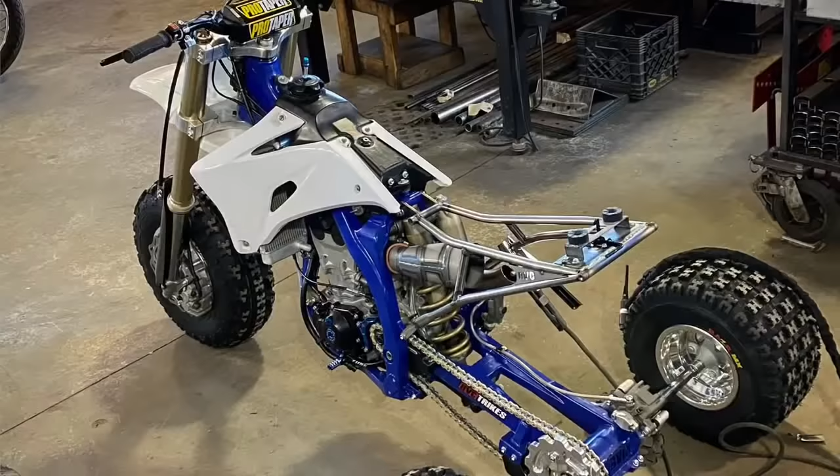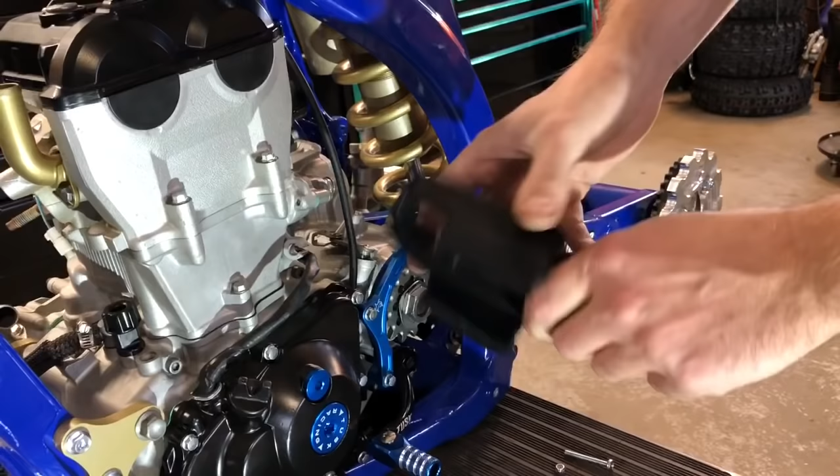Guys, so now we're going to install our chain guide. We use TM Designworks, but we actually modify them. We clearance this out to fit our swing arms. So first thing you're going to do is take your sprocket off.

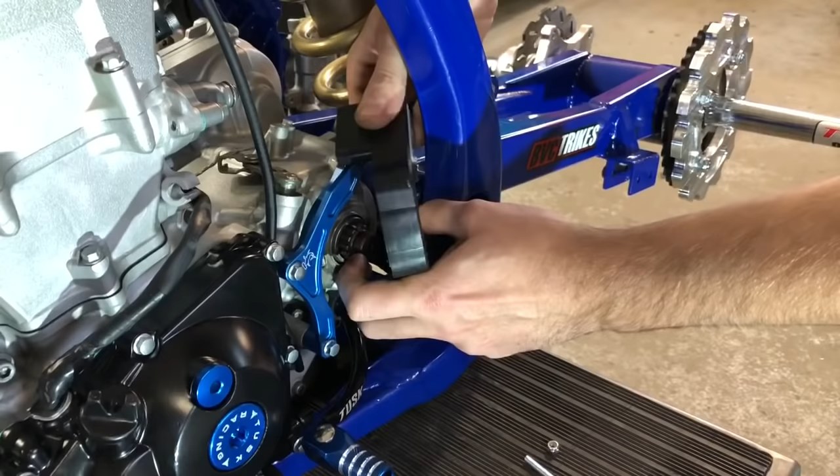You're going to take this, it's going to come with a bolt in it. You're just going to take that out, stretch it a little bit. Just work it around your swing arm, around your motor. It's a little tight, but it does go right on, just like that.

And now you're just going to go back on over here. Slide your bolt through with your washer and your nut. And when you snug that down, it'll be right on the swing arm.

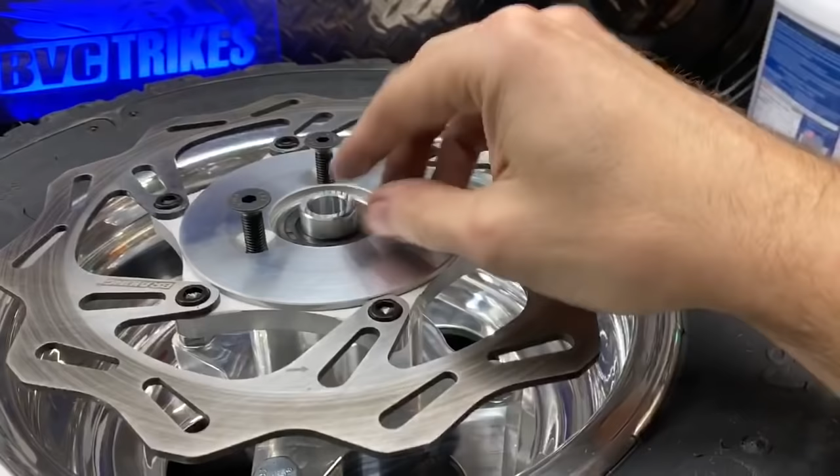Now guys, it's very important when you install your rotor adapter bolts, use some red Loctite on these. Same thing with all of your rotor bolts themselves, definitely throw some Loctite on there.

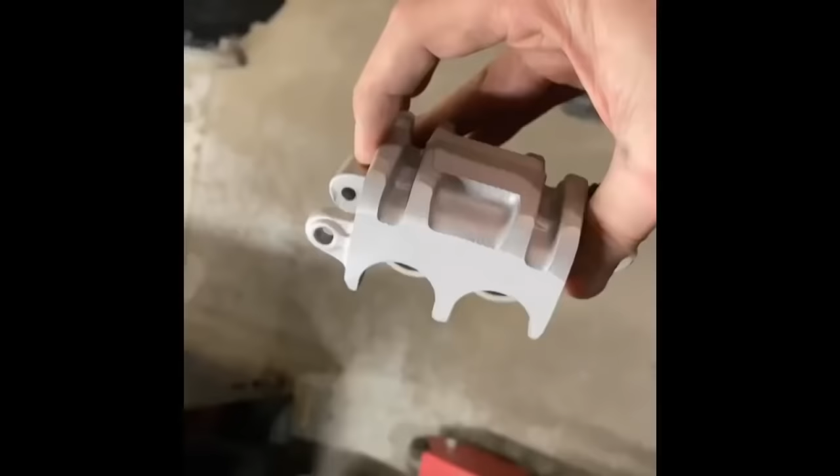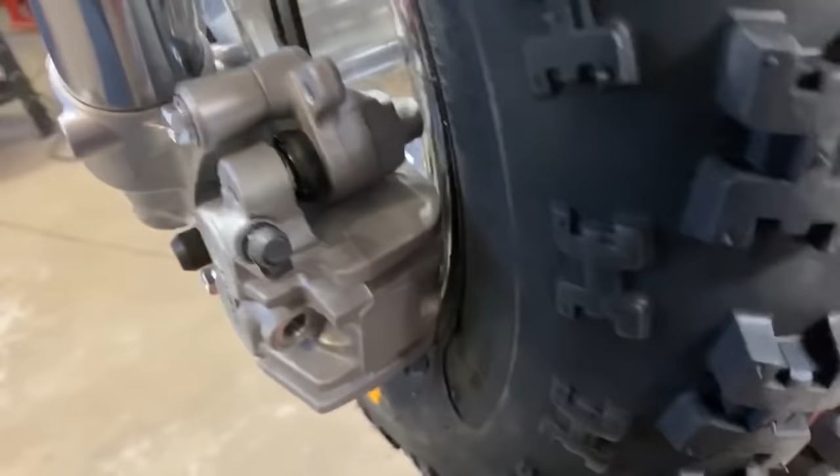Here's another shot of the front caliper clearance. You can see why we actually shave part of the caliper on some models. Not all of them require this, but on the Yamahas, they just have a very large caliper. So we always check fitment, make sure you got clearance there. Let's see if I can zoom in here.

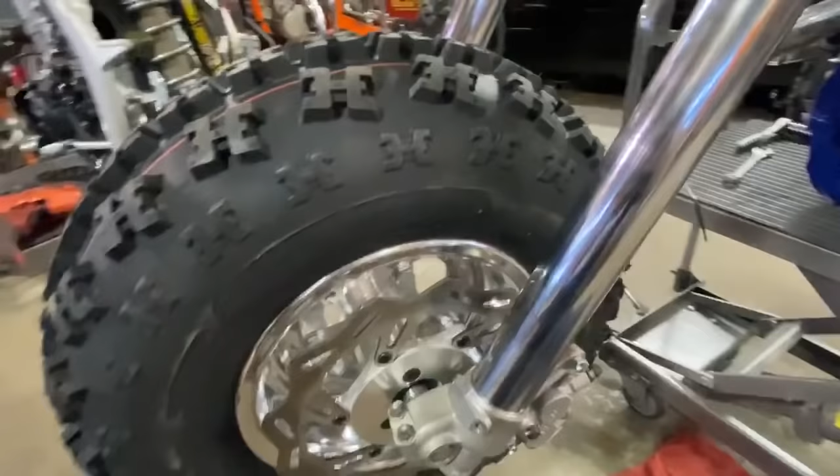Very tight fit, but we're running modern larger dirt bike brakes on these. So sometimes you gotta do some shaving and some fitment.

You can see our front hub with the 10-inch wheel, rotor adapter. You're mounting your original dirt bike disc on this rotor adapter. We put the axle flush on this model. Got our spacers on each side.

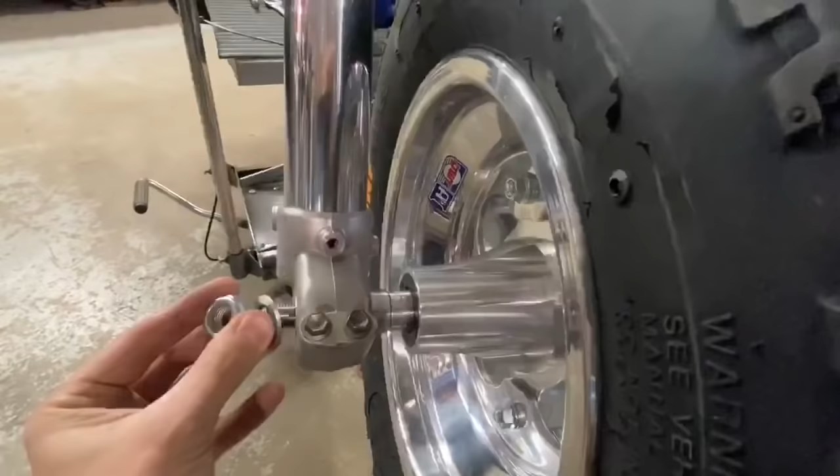Always make sure you have enough stick out over here so you can get your washer and your nut all the way on. You don't want this thing hanging off, so always check fitment, make sure everything looks right. Very important. That's pretty much it, guys.

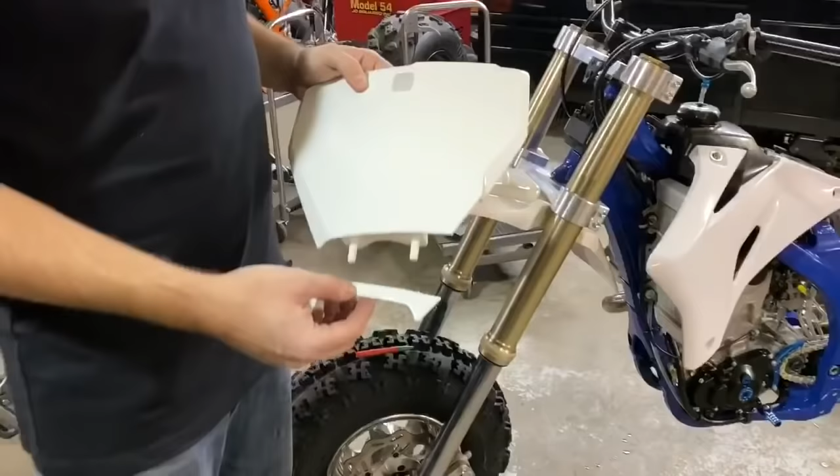Okay guys, so everyone asks me what number plates we run with our triple clamps. If we're not running a headlight, we actually like to use the Husqvarna dirt bike number plate. We simply trim the bottom of the plate off like this with a pair of tin snips, and then clean your edge up with a razor blade. It leaves these two little pieces sticking down.

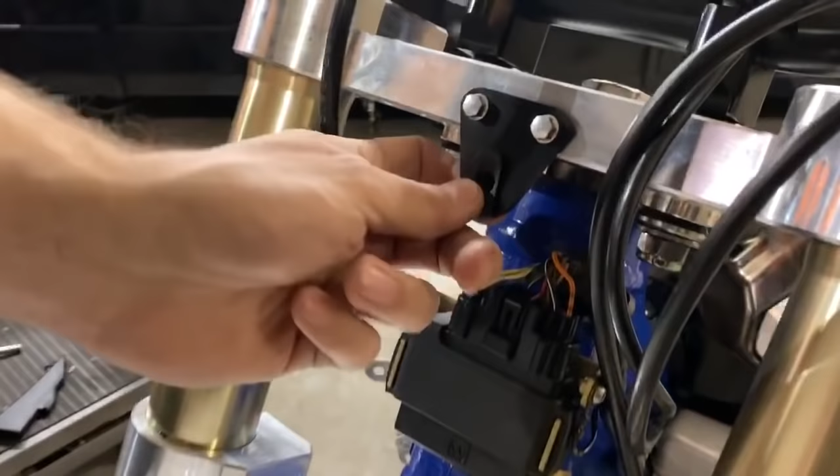So now I come over here and I have a bracket that we include with our triple clamps, and we have a threaded insert right here. So all we do is we line this up, and I quite simply just drill 2 holes in this 200X fender. This will slip down into the fender and then bolt right here. Super clean setup. It clears all the cables. It actually acts as a cable guide when it's mounted right here.

Keeps your cables where they should be. Keeps everything super clean. You don't have any annoying tabs up here. So we try to keep everything as clean as possible. It is a little bit extra. You do have to buy a number plate if you want to run one like this, or you can make your own mounts for your plate, but this is what we recommend for the $15 that they are.

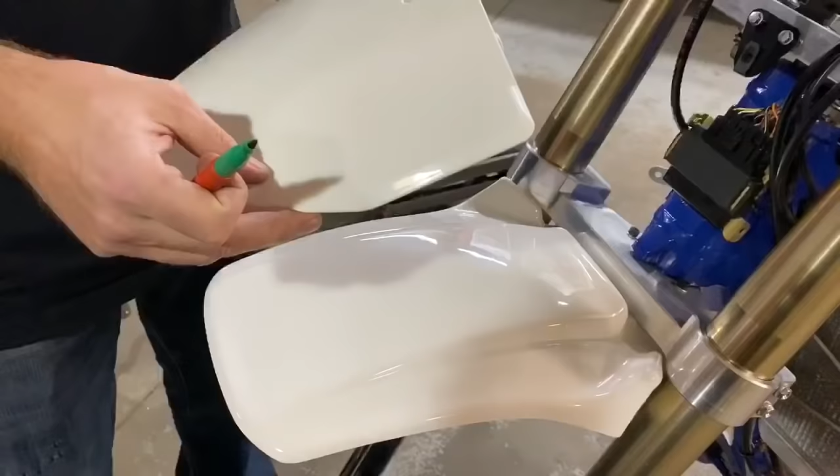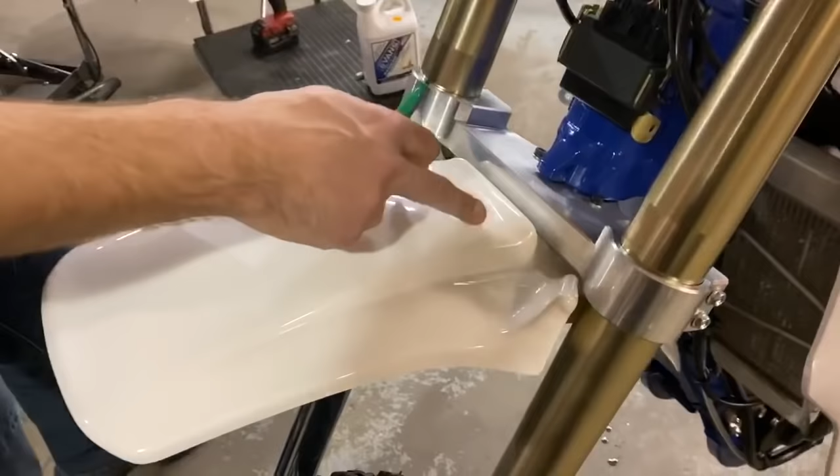So all you do is you hold this up right here, line up your bolt hole, and try to set your angle of your number plate so it's not too far back. You don't want that pushed in look, so I try to set it just about right there. And then go back a little bit and just mark with a marker directly in front of those little pins. And now you're gonna drill 2 holes here that I would say is slightly smaller than the tip of this. Just, you want this to kind of press into it, and it will expand out when you press it down, and it'll hold it nice and tight.

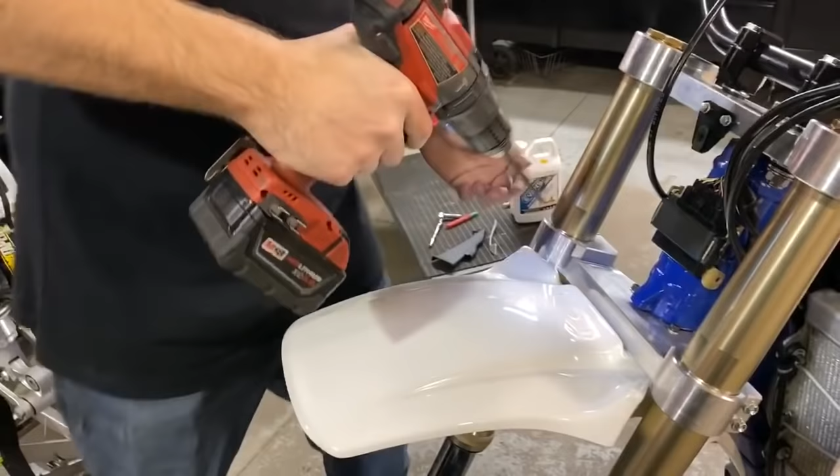So this is a 5/16 drill bit. I'm gonna start there and see how it fits. Just gonna very carefully drill these holes. Grab the air gun.

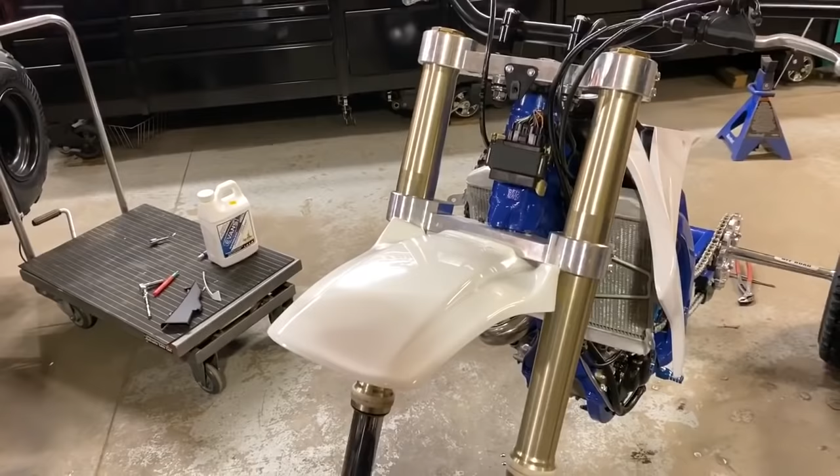Now, take the number plate, stick it down into the holes. See, that slides right down. I'm actually going to open that hole up slightly so that this goes a little bit farther down. That's pretty much it.

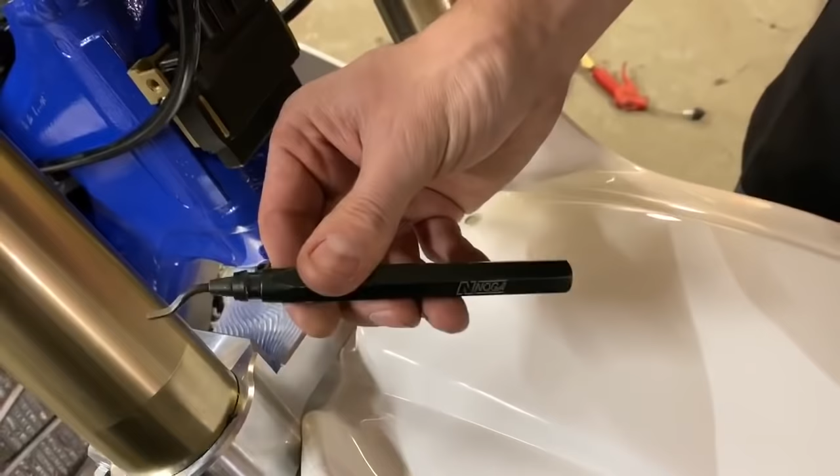So, if you guys don't know what this is, a deburring tool. Just take it and clean up your holes. Gives a nice finish when you can get all the pieces out. Just like that.

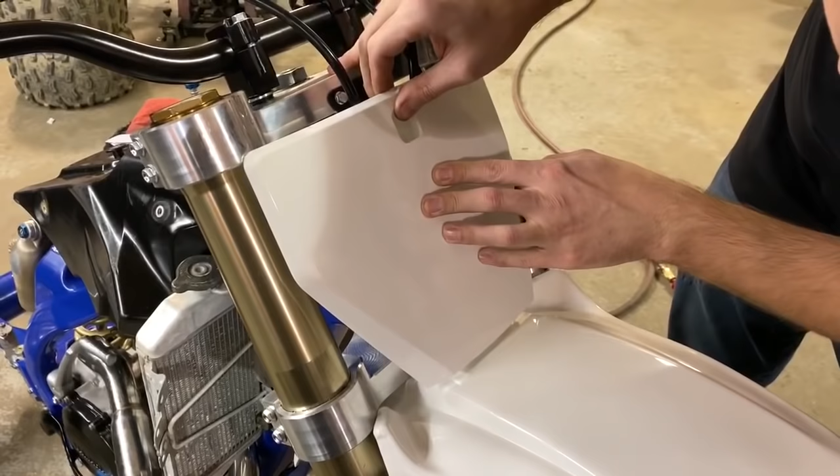Alright, so now, slide this on. Try it again. So now that goes all the way down. Now we're going to bolt it onto our bracket. Simple as that.

Well guys, she's coming together pretty good. Got the subframe all mocked up. We actually decided to go with a Honda seat and plastic on this build. It's honestly what we keep in stock for most of our builds, so it kind of made sense for us. And on top of that, we like the way it fits, and we like the seat height that it provides.

Kind of see what we've been working at here. It's a bit of a process creating a subframe from scratch when you haven't done it before. Definitely takes some time, but if you take your time and make sure everything's perfect, it's amazing how it turns out.

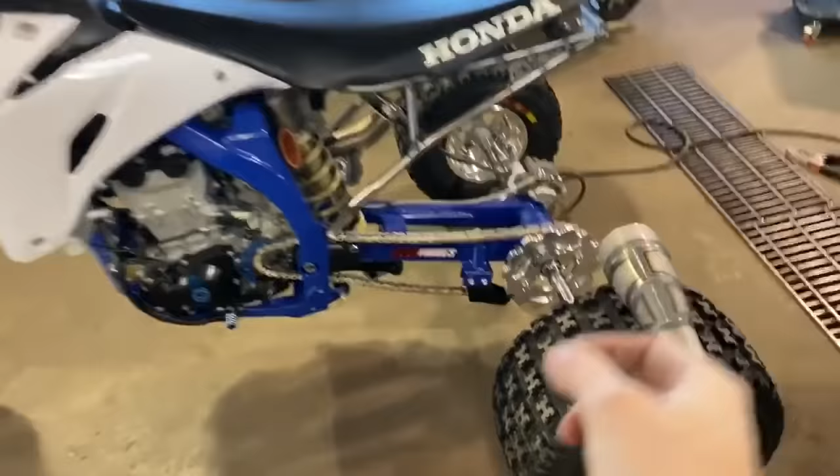Yeah, this build's gonna sit nice. It's our intake tube. It's gonna go into the intake there.

Another project that was shipped to us today. Another CRF 450R. He actually crated it up himself, took the bike apart, so that was pretty cool. Looks like he did a nice job. I'm gonna open it up actually in a bit here. A little bit of a drive.

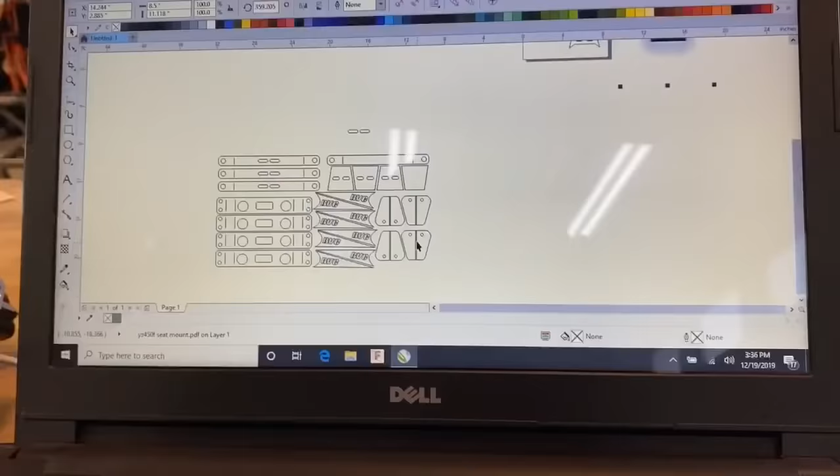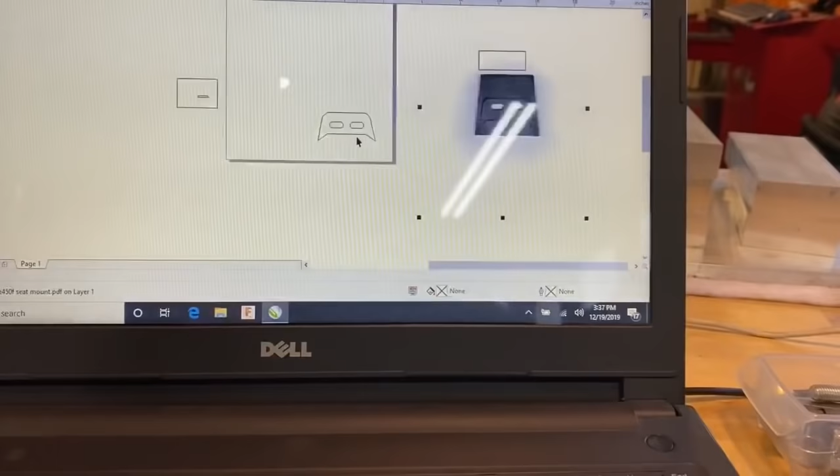Just want to show you guys a quick process of how we actually draw parts for our plasma cutter. I apologize if the video is a little bit funny looking, it just does that when you're videoing the screen. But as you can see here, I needed to make a front seat post mount, so I quickly sketched it out. We actually scanned that in, brought it in as a PDF, and this is now our tracing of that. There's many tools in Corel Draw that you can use.

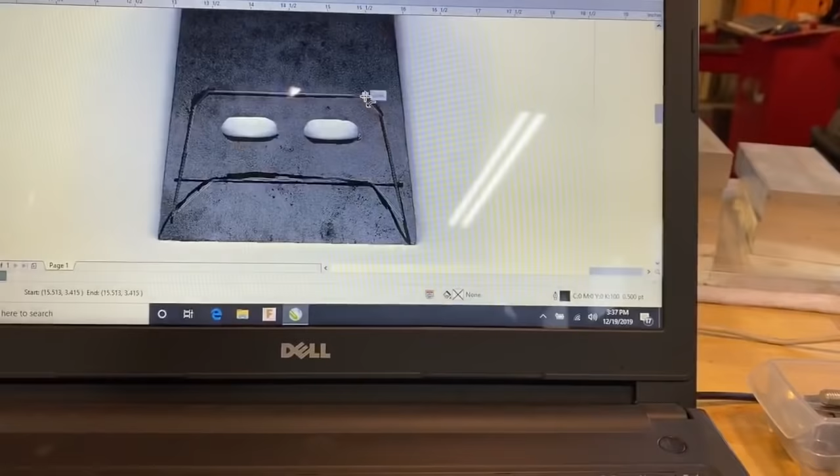For example, when you're drawing it, you can go right here. You get the idea. Obviously we would clean this up, but everything starts out as a 2D image for plasma cutting. So there's our finished drawing, it's already grouped together.

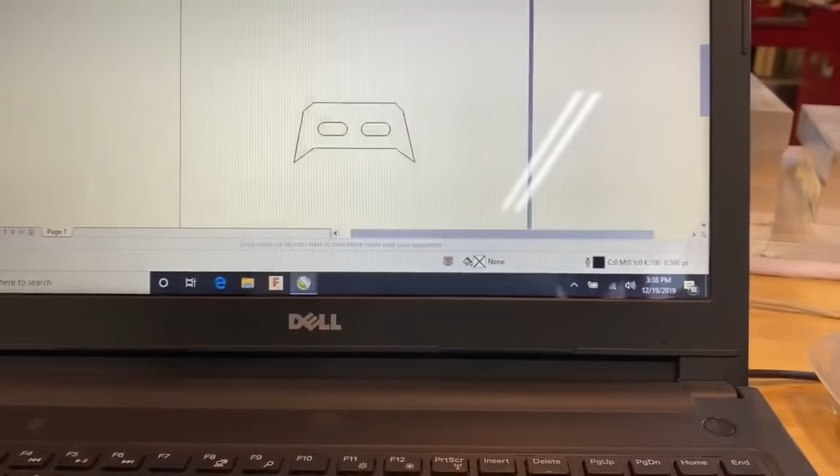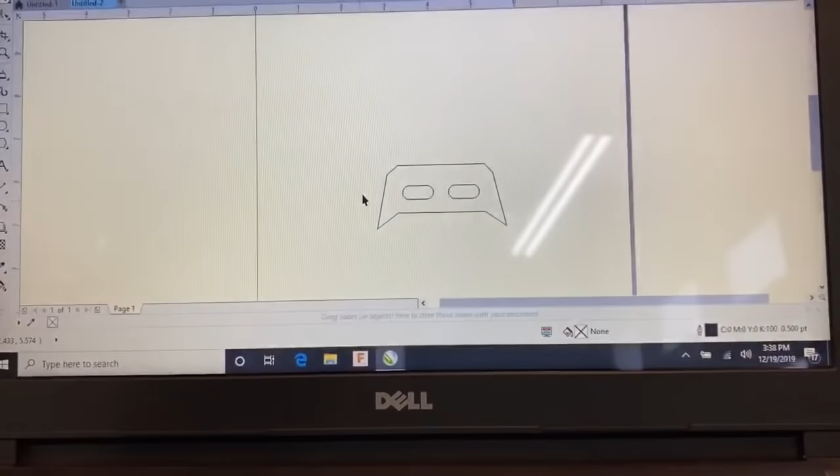So now I'm going to put that into a new window, center it, and export this to the drive. I like to label all my folders. Seat mount front, replace it, hit export. I actually made an adjustment to it. I already built one on the bike, but I wanted to move the holes back a little bit just to tighten up the gap on the seat post. So just like that, it's on the drive.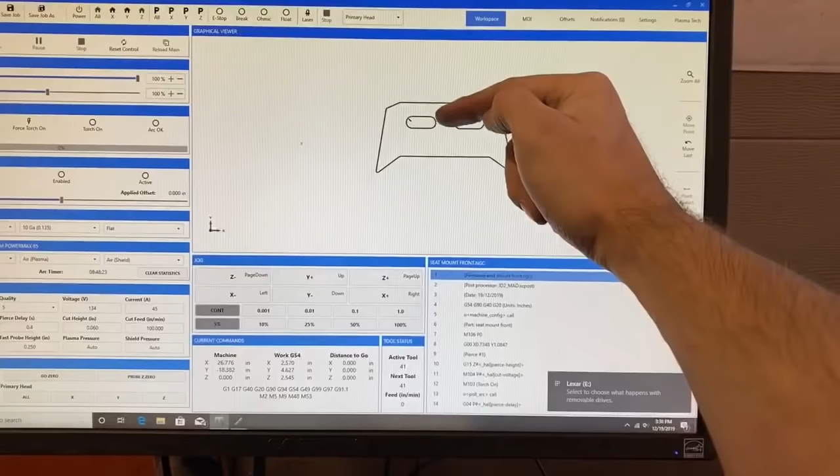Bring that over to the plasma cutter. That's the old file, I actually moved the holes back a little bit, and select the same name. You see here the holes are actually back the way I wanted them. Always double check that.

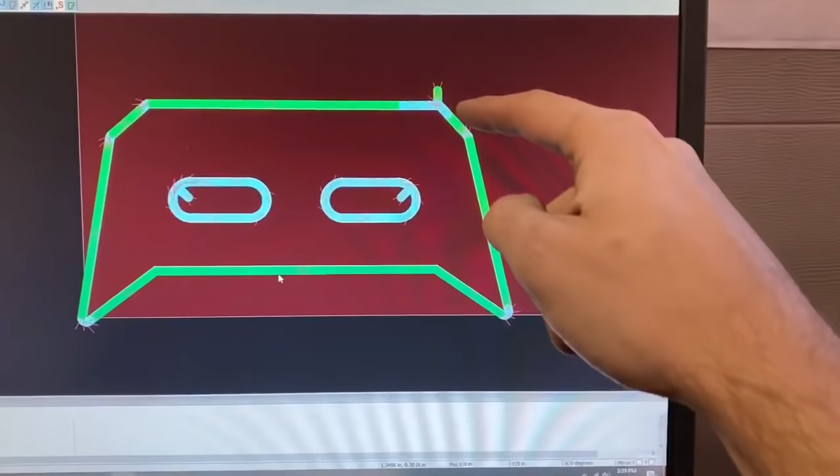Alrighty, so all we're doing is telling the program where the cut's actually going to be. We have a lead in and then the actual cut, and it does know to have the offset, so when it does cut your hole it comes out to spec.

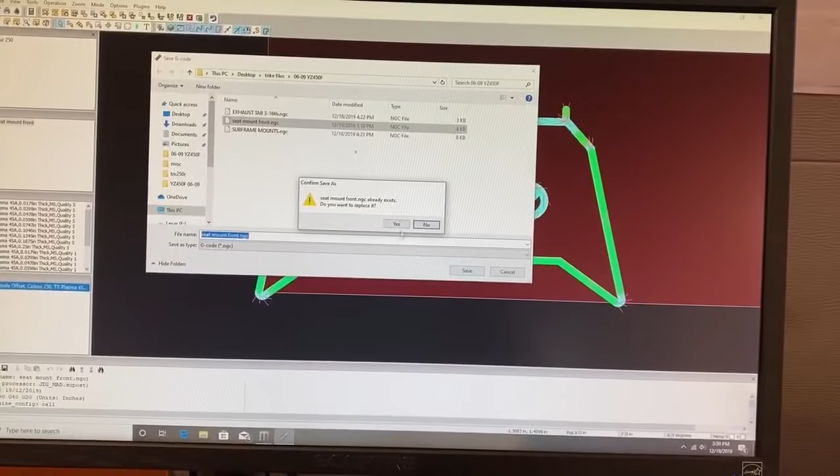So now we're going to post process that. We have an additional file that's actually named the same with a different file format. We go back to our actual software here and re-import the one that's updated. See how the holes move down right here again. Make sure that's correct, all the materials look correct.

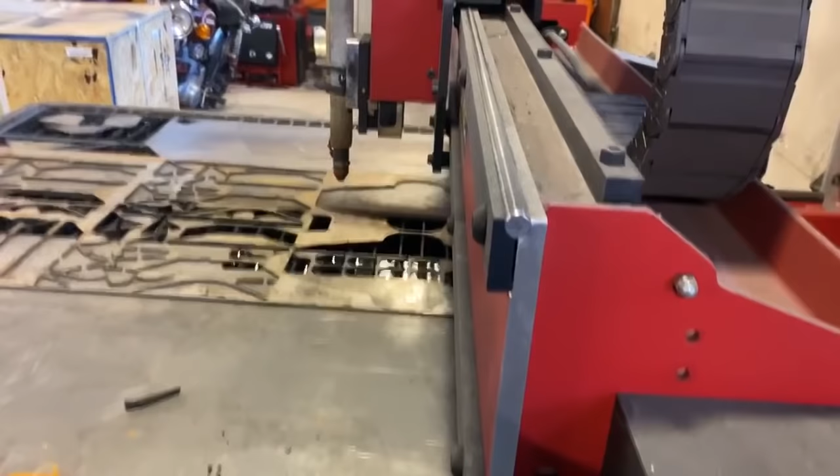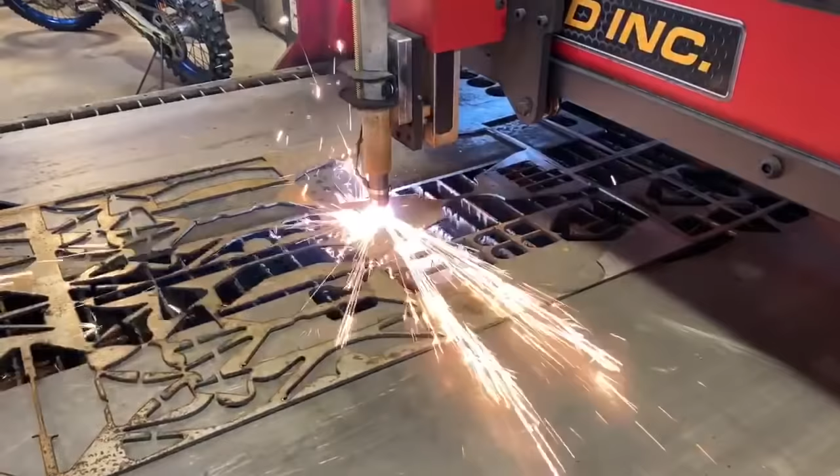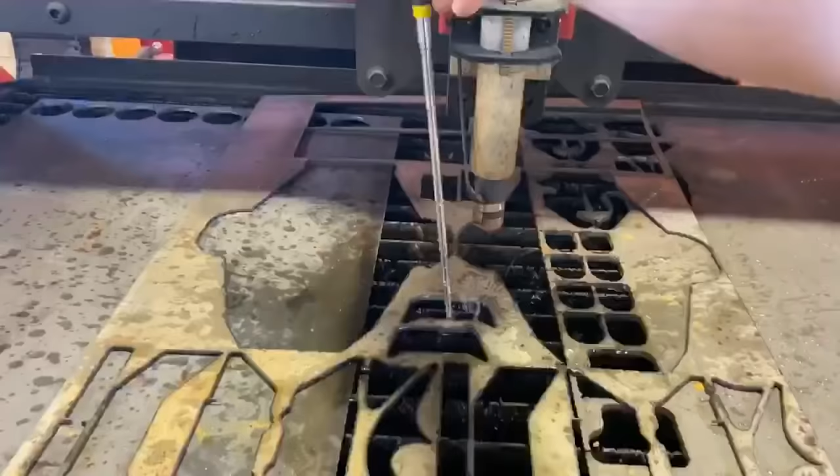So I'm gonna jog the torch. We're gonna zero all, so now our torch is zeroed for that location on the metal, and we're just gonna hit run. There it is, guys.

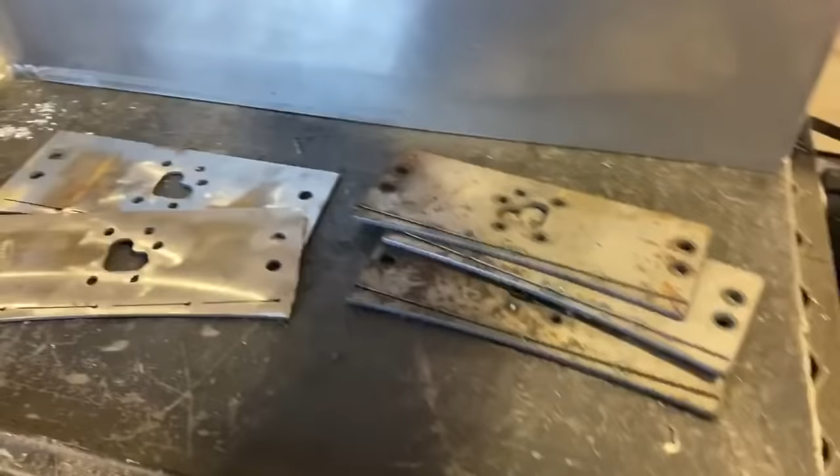Now just do that about 100 times when you're building the trike. Can't tell you how many revisions we make on our files till everything's perfect. So now we grind it off, deslag it, get it cleaned up, get it ready to weld on the bike.

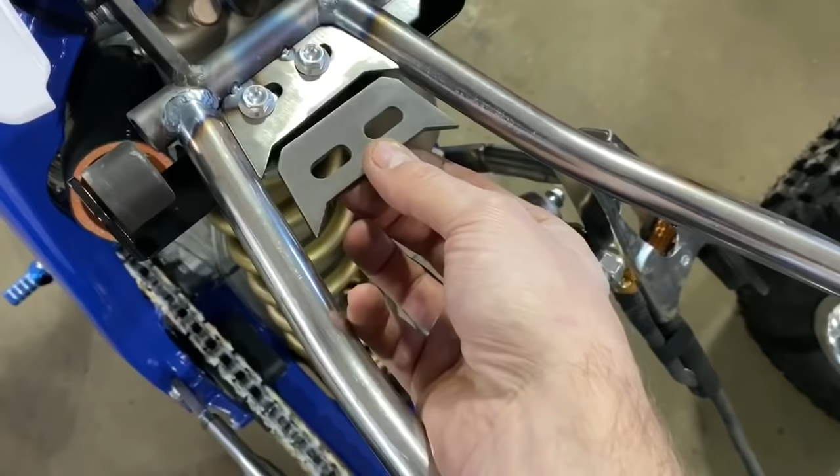So now you can actually see the old one and the new one. I'm gonna pop that off, I only tack welded it in 2 spots. Put the new one back in, and that's gonna bring this whole post back about a quarter inch.

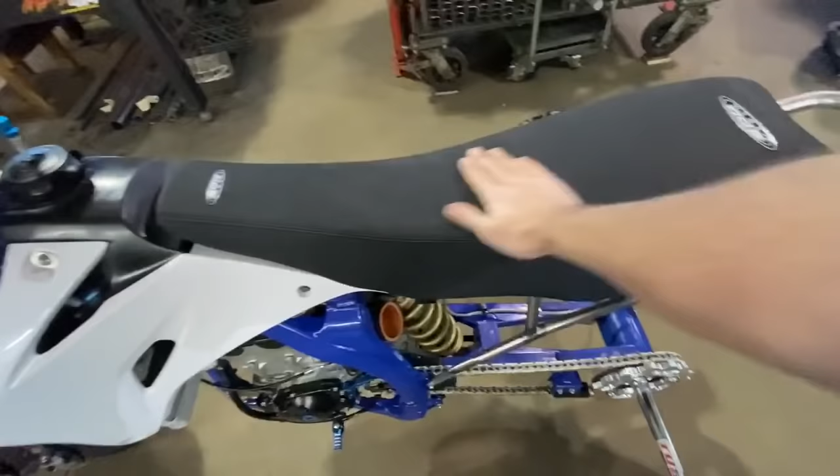There it is, guys, that's the seat we're actually gonna be running on this machine. SDG actually makes a decent seat, they're about half the price of OEM, and I honestly like the foam a lot better. The seat pan is almost an exact copy, so I double checked fitment between this one and the Honda seat. Everything fits nice, slips into the holders real nice, seat's nice and tight.

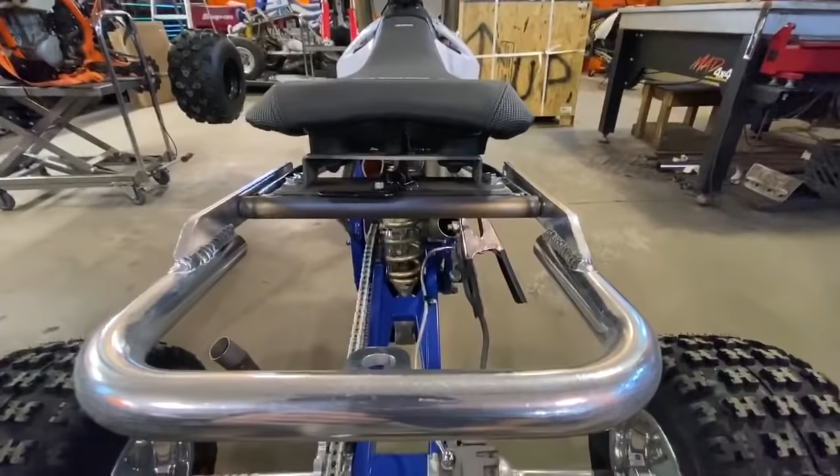You can see we actually make our own seat mounting post. We're just using the OEM style latch from Honda. Just simply pop your seat off like normal.

There it is, guys. In the next video, we'll do the final assembly after all this stuff's powder coated. We'll also get the graphics kit design, I'll show you about the printing process. We do have a print shop in-house, so I'll video some of that. We're also debating on putting some Nerf bars on here, we do have a set, so we'll see how it turns out. I'm gonna build some pegs and then get those installed depending on how they fit. But other than that, this thing's looking pretty kick-ass.